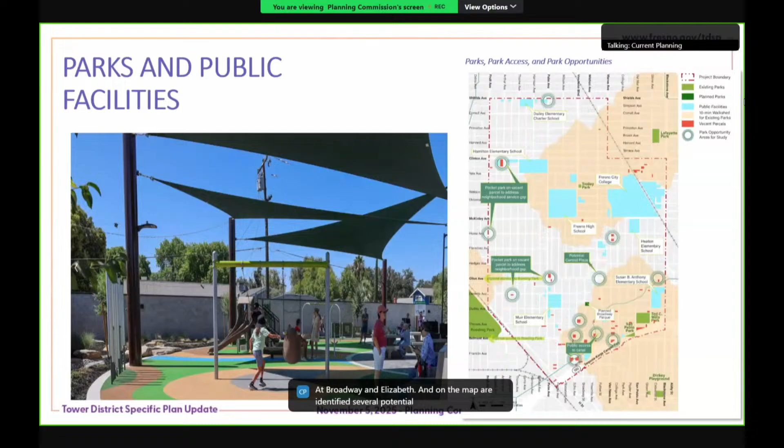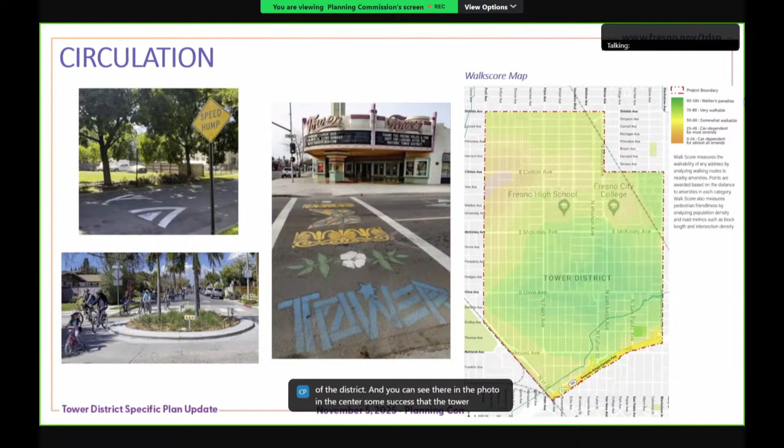The circulation chapter includes policies to improve the multimodal functions of key corridors, to enhance main streets, encourage active transportation, improve transit and pedestrian safety, and calm vehicular traffic. Placemaking and public realm improvement policies are also included to enhance the identity of the district. You can see in the photo in the center some success that the Tower District has already had with doing creative placemaking in the district.

Essentially, what the land use changes seek to do are one of about 3 things. One, align the proposed land use with the existing uses that are on the ground right now. Two, redesignate areas that are underutilized for neighborhood mixed use. Three, increase housing opportunities along the major corridors by designating those corridors for mixed use.

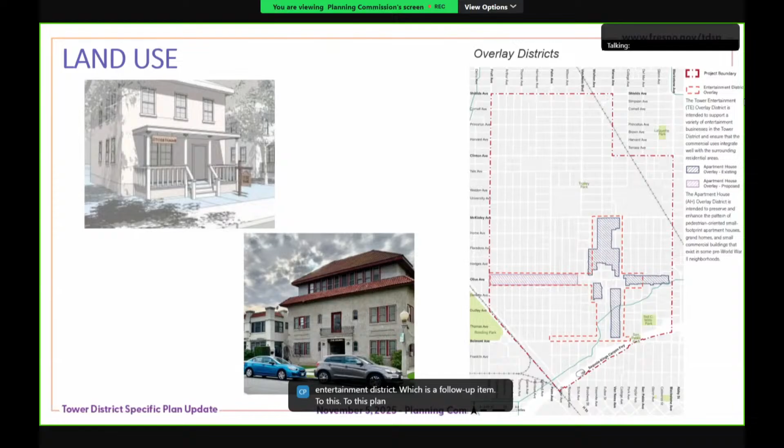So now we will take a minute to describe the new tower design guidelines, which are called the Design Standards and Guidelines. I do want to point out that the Tower District is the only neighborhood in Fresno that has adopted design guidelines, so these are pretty special. They were originally called for in the 1991 plan, and it took a while to get those adopted. It was one of the first things I got to do when I came to work for the city of Fresno, was get those 2005 guidelines over the finish line.

Why did we update these? The 2004, adopted in 2005, guidelines are over 20 years old, and conditions change, construction practices and materials change. Many of the guidelines were incorporated into the new development code that was adopted in 2016. Specific plan policies need to be integrated into these design guidelines. Development feasibility needs to be addressed to implement Fresno's housing element, and California law requires objective standards to expedite review of qualifying housing projects. So that was one of the main drivers for updating them.

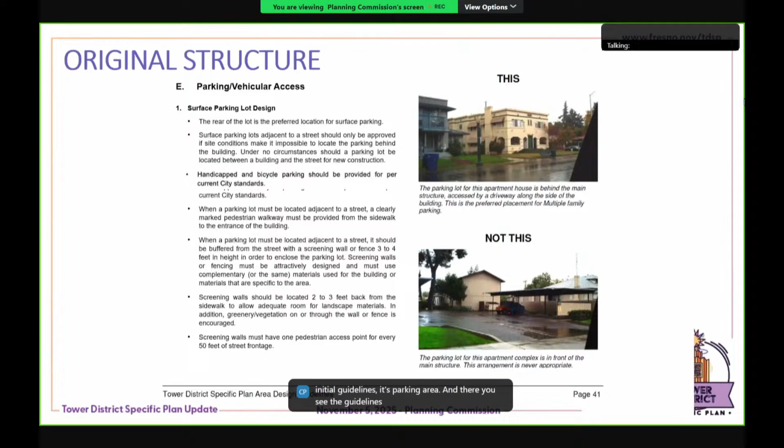They don't look too different from the original guidelines. Here we have just a page from the initial guidelines—it's a parking area—and there you see the guidelines with some photos that we hope are helpful, this and not that. In the new structure, heading names may change to match our development code, and each section is now divided into two sections, standards and guidelines.

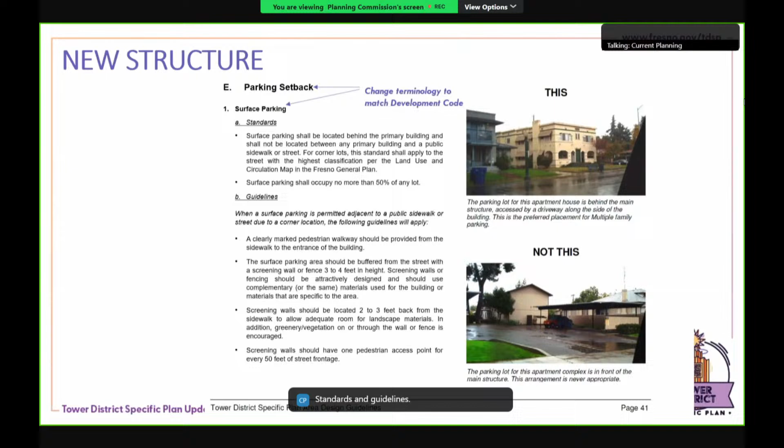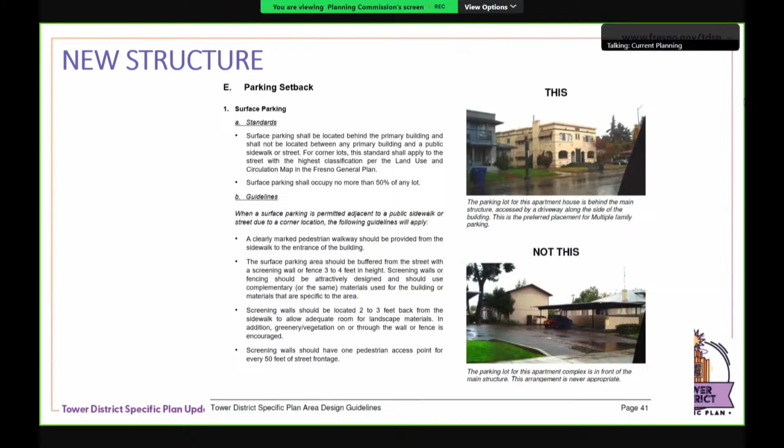I wanted to spend some time talking about the public comment that we received. We're going to talk about not only the public comment we received on the EIR, but also the public comment on the Tower District specific plan and the design guidelines. So we'll start with EIR comments.

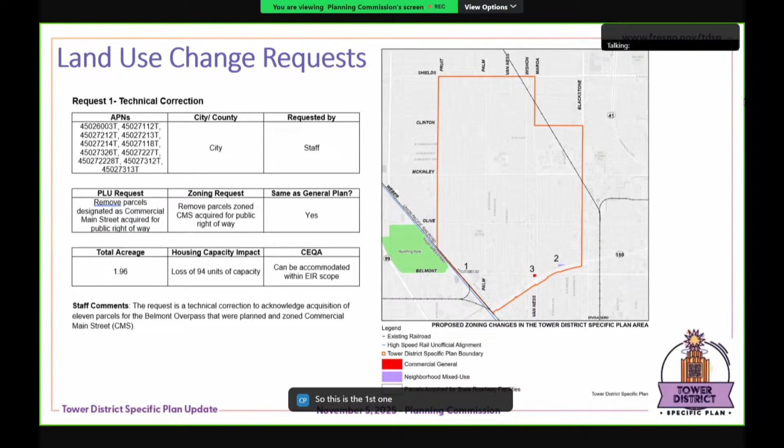We'll go to the second one. This was a council motion at initiation that we did not incorporate correctly on our initial zoning map. It applies to 1 parcel that is 0.58 of an acre, and the request - looking at number 2 - is that it should actually be from medium density residential to neighborhood mixed use. I apologize because that's not what your handout says.

It's medium density residential to neighborhood mixed use. This was initially a request made by the South Tower Community Land Trust at the initiation hearings, and the council did move to include this particular land use on this parcel. Staff actually got it confused with the next one, number 3. To repeat: that parcel, number 2, indicated on the map above, should be going to neighborhood mixed use - it is currently planned medium-density residential. So you could cross out general commercial on your list and put medium-density residential, and I apologize for that.

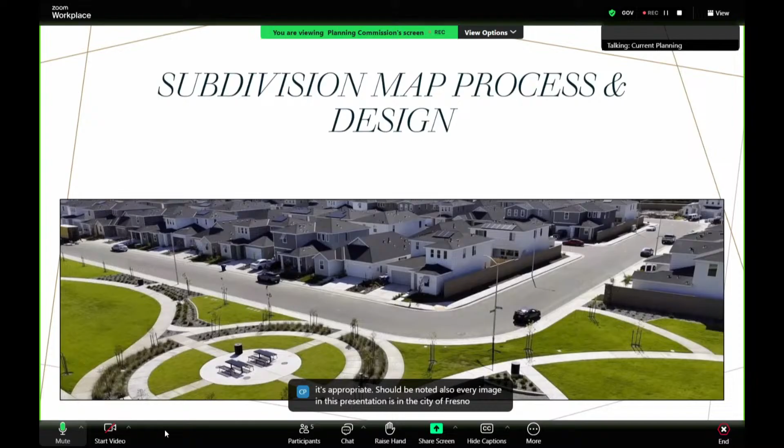We're going to start with the subdivision map process and design. I wanted to show what goes into map design and what's brought to you when it comes to commission is the final product. This is showing everything that goes into that final product to make sure that it does comply with the code, so you understand what we all have to review.

Starting with the basics, there are two different types of maps: parcel maps and tentative maps, or what we call them here, tentative tract maps. Parcel maps are usually 4 or fewer parcels. There are limitations, and that's really just for residential—you can have more with non-residential zones, but that's the standard. With tentative maps, it's 5 or more parcels, and that's generally single unit residential development.

There are vesting maps—you might notice that term a lot—where if it's submitted prior to a code being updated, it still has that vesting right of whatever those code requirements were.

Starting when looking at an application for a tentative subdivision map, we first look at density, which is how dense a project is allowed based on the zone district, calculated using net acreage. There's gross, which is the entire land plus all the major areas, streets, dedications, things like that, but the net removes those dedications. If you have large power line easements, we don't count that towards net acreage because you can't build on those.

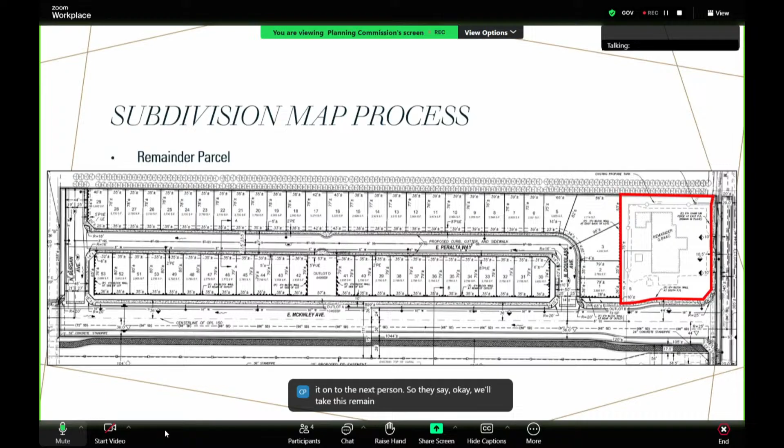So those lots, that remainder was the person that was selling it. They wanted to still live there, but be able to sell off the remainder of their land to the developer, so that they can continue to live there until they pass it on to the next person. So they say, okay, we'll take this remainder, we won't count it towards this subdivision, and we can subdivide everything else. That's the purpose of a remainder lot and how it works.

There are requirements for block lengths. So within a subdivision, the length is generally a minimum of 200, max of 600 feet. When the next intersection comes, then that's the next block, so on and so forth. There could be a deviation if the alignment of existing streets on adjacent properties justifies that, but that's the standard.

And just going quickly through the lots, side lot lines are required at right angles to the street, or radial if curved. What that means is the new properties cannot go straight and then have a jogged line and then go back again. It has to be all straight lines throughout, like normal. It can't be on the side. So that's what that means.

Frontage of lots to public streets is required unless there are private streets proposed or if there's access to a paseo proposed. Double frontage lots are lots where the property has two streets fronting and rearing the property, so there's no property behind you or in front of you. Those are allowed for major streets, where you relinquish the access, meaning you get rid of any kind of pedestrian access from one side, usually along the major street, but you need a 10-foot landscape area as well as a 6-foot wall to allow for that. For local streets, not some of the majors like a Gettysburg or a Shaw, they're only allowed at a depth of less than 200 feet, and they have to relinquish on one of the sides for a local street.

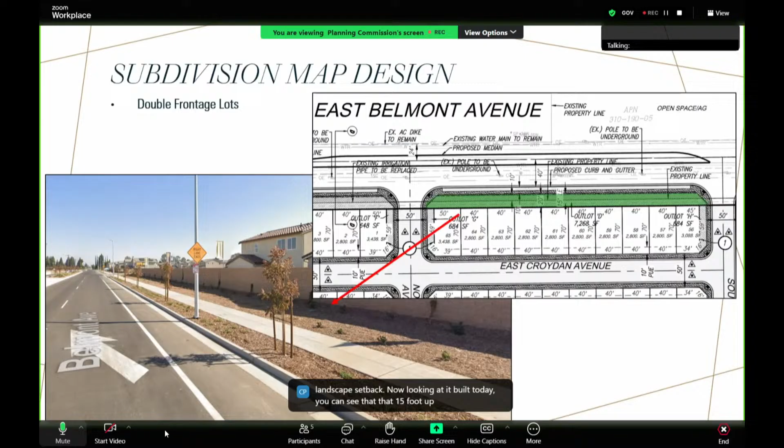For corner lots that have entrances - when a local street, the blue, intersects the major street, the red, which is usually the entrance of a subdivision - those corner lots have side yards onto the local street. The street side yard requires a 10-foot landscape easement along with a wall, and these are usually incorporated as something called outlots.

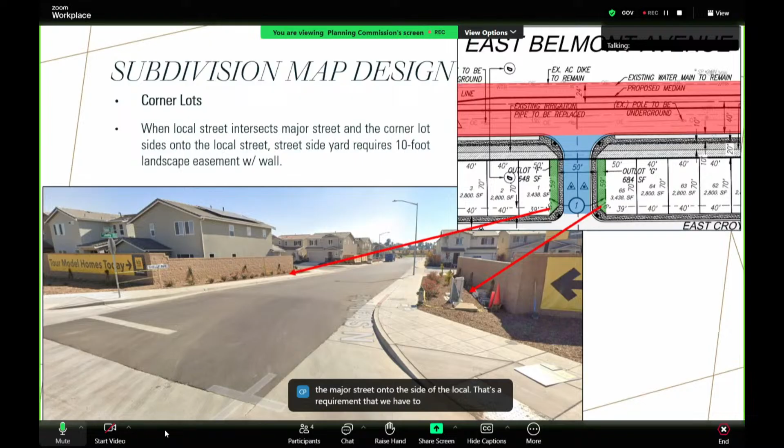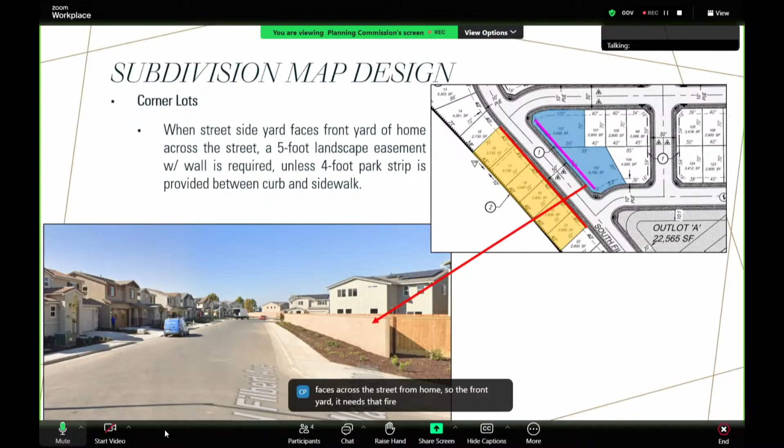The blue is the side on the right with the red arrow. Because that street side faces across the street from homes - the front yard - it needs that 5-foot landscape easement and a wall, which is what they did here. They could have also done a 4-foot park strip, either way. So that's what that means and how that works.

For connectivity and street design, we look into three things: local streets, connectors, and majors. Locals are your standard interior streets within the subdivision, minimum right-of-way, based on public works standards. Connector streets connect major streets through the center of quarter sections, both north-south and east-west, or as close as reasonably possible to the center alignment based on existing features. It sounds confusing, but I'll show some pictures that make it easier. Major streets are your standard collector, arterial, super arterial, and expressway.

Herndon is an expressway, Veterans is a super arterial, and Gettysburg in some places is a collector. So getting to connector streets - some work perfectly, some do not.

So here you can kind of see the 4 corners of the major streets, and the yellow are the connector streets. Connectors, I call them glorified local streets, a little wider than your standard local. The purpose is to get everyone within that major intersection, the 4 bounded streets, to a street that can get you quicker to that major street without having to go to an extended speed. A lot of these streets going east, west, north, south have a stopping point before reaching the major street. They never connect directly. That's the purpose of those connector streets. But sometimes we don't get that.

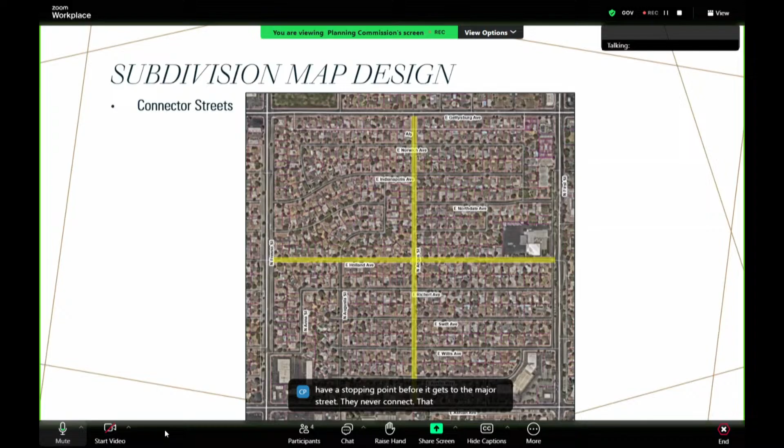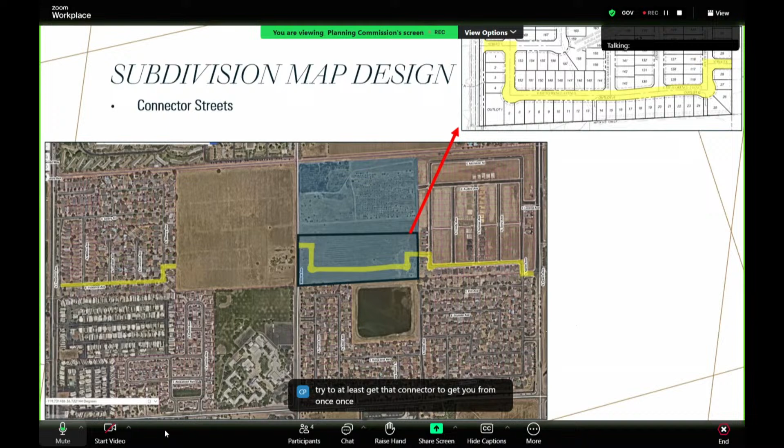Now, connections to adjacent areas. Where the subdivision adjoins unsubdivided land, stub end streets shall be extended to the adjacent unsubdivided land to provide access to the unsubdivided land in the event of its future subdivision. There's one connection required for every 600 feet of adjacency. That stub street is to be designed as a temporary turnaround, which might look like a cul-de-sac to you. I'll give you an example.

This is not applicable to planned developments or gated subdivisions. So what that means is on the right pane here, you'll see a subdivision that was approved earlier this year in Cornelia near McKinley. There are both examples here: there's an existing connection to the eastern subdivision that's already built out, and then all of this is what I call similar zoning - it's all residential single unit, all RS something.

So when there's availability, large areas that aren't developed on adjacent properties, you want to connect to that for future subdivision in case the next person 10 years down the road wants to develop this and can connect to that. Now, if this was a gated community, we wouldn't consider it because it's going to be walled and it is what it is.

But how that is done, you can see going to the north, there's kind of a circle there. That's a temporary turnaround. The applicant has an opportunity to contact the adjacent owner to see if they can build it on their property so that in the future we won't have this turnaround to deal with that just looks weird - that way it's just a straight road, and the person can demolish the turnaround and keep building.

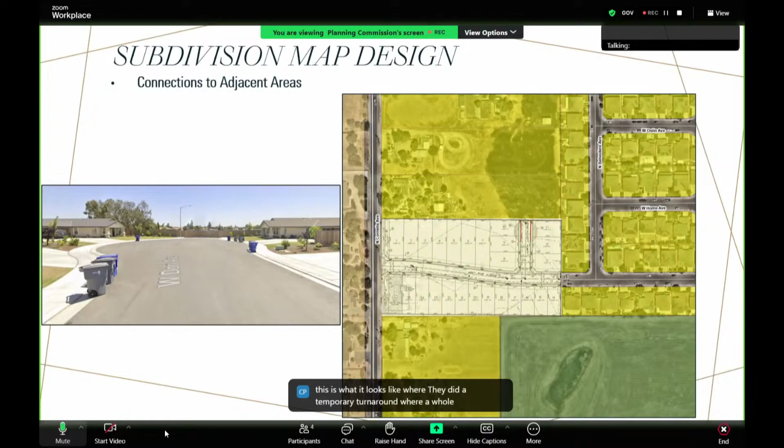So quickly here, emergency vehicle access, known as EVAs, are points or areas in subdivisions that are gated and usually only accessed by fire or some emergency vehicle. And then pedestrian access to major streets - for subdivisions adjacent to a major street, you need a pedestrian path spaced no more than 600 feet apart, usually a paseo. I can show an example.

So starting with EVAs, we have this map in Copper River where on the map, the blue area is the private gated pedestrian access point.

And that's the only one. Usually you need 2 points of access for fire. So on that map, I have a couple of red squares - that's where the EVA gates are. You might see them all around Fresno. That's what it looks like to the left, where usually the public can't use that, but fire can access it if they need to get in and out, in case they can't make a specific turnaround or something like that.

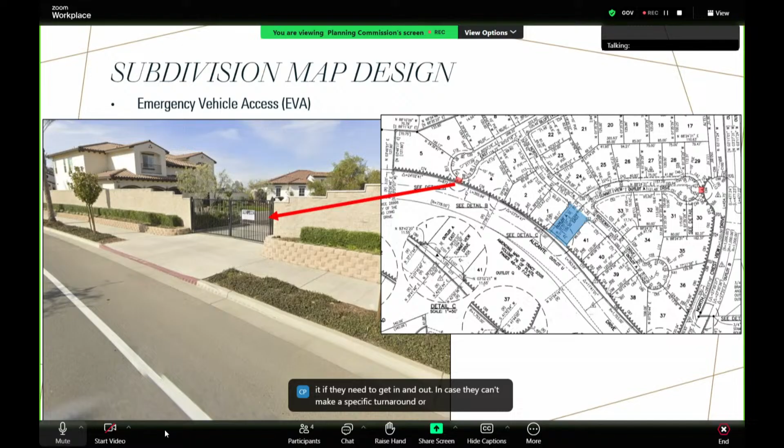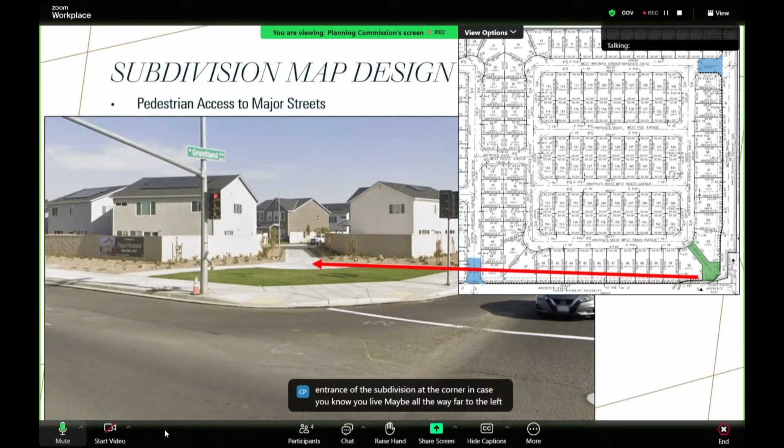For pedestrian access to major streets, if you have larger subdivisions with wider or longer depth, it may be longer than 600 feet - maybe 1,300 feet long property, all along a major street. You'll need some kind of paseo so that when someone lives deep in the subdivision, they don't have to walk an enormous amount just to get out. Paseos let you access schools, transportation, whatever you need. Here's an example of a great feature for the entrance of the subdivision at the corner, in case you live far to the left and would otherwise have to walk all the way around. You can just hit that corner and you're good.

Trails - incorporation of site constraints. We have planned trails all throughout the city, and when we do have planned trails, we have to incorporate them in our subdivision design. What it states is homes should front onto a trail or other communal area unless topographic conditions justify a variation, the proposed homes would face a major street, or the Planning Commission determines there are no feasible alternatives. So I'm going to show you an example of what happened prior to this code and why this code exists today.

Here you can see a trail that has homes siding and backing onto it all the way down the corridor. The homes are not facing the trail, they're not fronting it. Usually when you front a trail, the intent is you have eyes on the trail - the front of the home can see it. Here, if someone were to bike or walk at night down this trail and there's issues with crime or something going on, there's really no preventive measure for someone to get help. Nobody can see you. It's just a dead-end area, so it's probably not going to be utilized as much.

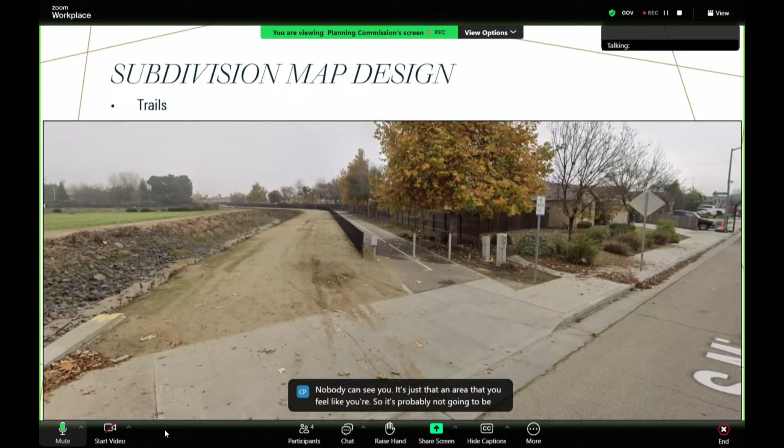That's when that code came into play, and this was a subdivision approved a couple of years ago. Originally, when it was first approved, it didn't have that requirement. Now they came back because it expired, and that requirement was now in place, and it's being constructed today. Here you can see the red line is the front of all these homes with a street looking at the trail. It also allows for siding - if you see the home on the top right, that pink line, it's siding onto the trail, but not backing onto it. That's also allowed because usually the side would lead to a street.

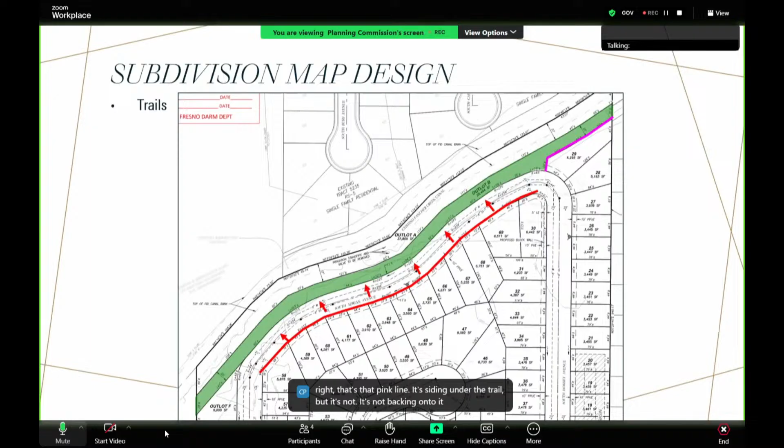When you do that, you start getting homes that front onto the trail. They're looking across. You would feel much more safe going down this trail because you know there are eyes on it - someone can see you if something happens.

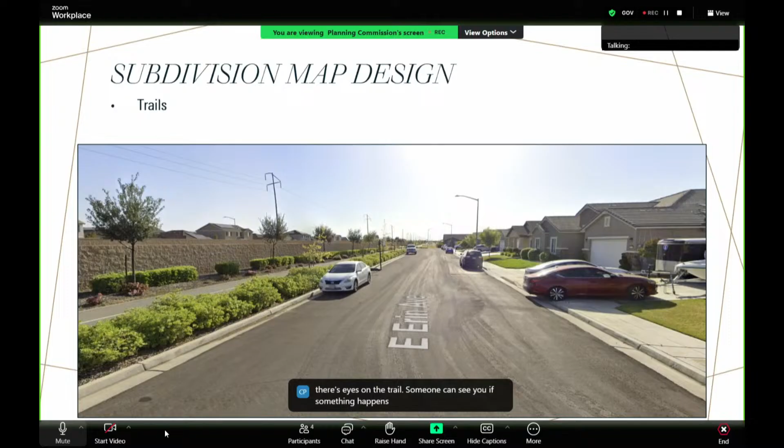Now, getting into open space, I want to make sure you understand planned trails do not count towards open space calculations, so keep that in mind for the future. Open space for single unit development applies when you have more than 50 parcels. If you have 50 parcels or less on a map, you're not required to have open space - you just pay in-lieu fees, although you can provide it if you want to. It's just not a requirement.

When you have more than 50, there's this number I have ingrained in my head: 0.001884 acres per dwelling unit. That stems from our general plan, which says we need to dedicate 0.6 acres per 1,000 residents - that's where that number comes from. So when you have a subdivision that requires open space, as an example: if you have 51 lots, that results in about 4,100 square feet of open space. If you have 150, you're looking at about 12,000. At 300 lots, you're looking at a little over half an acre.

So just to get a sense of when you see that open space, if you feel like it's not enough, it's a requirement for code to make sure it's enough. And the location should require that 50% of that park should be abutting a street, a trail, a sidewalk, something accessible and visible to people.

And then homes should generally face or side the park, not be in the rear. And they should be centrally located. There are some times where that doesn't happen, they could be split up, but they generally should be centrally located.

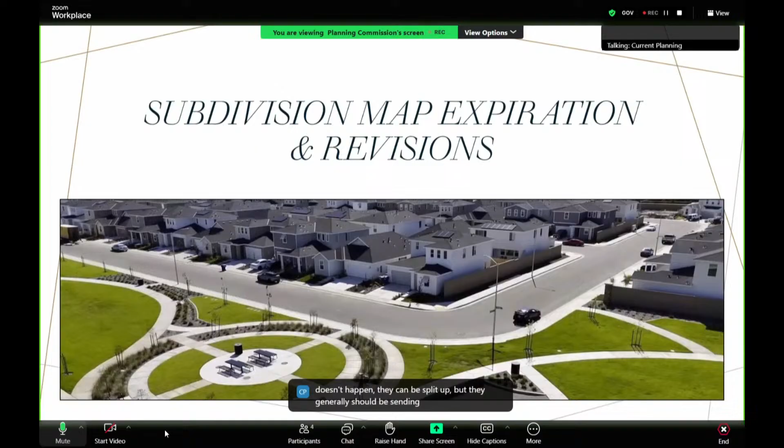And then getting into the expiration and revisions. Expirations of maps, the standard for all maps is 2 years. There are discretionary extensions that an applicant or developer can propose or request to us. That does have to get approved by the Planning Commission.

And usually that comes in 1 or 2 year increments and up to 6 years. Sometimes it's just the market conditions, sometimes it's, at a time it was COVID, so it just depends what it is. And there have been legislative extensions in the past, upcoming, and current that allow for automatic extensions.

So then there's something called phased maps. So when a tentative map, which is what you review, gets approved, it then has to go to final map, is what it's called, and get recorded. That's where the actual lots become legal, and that goes through our Public Works Department.

As part of that, they can do a phased map where, let's say you have a 500 or 1,000 lot subdivision, a very large one. Usually there are requirements from Public Works and other departments that are pretty significant on cost and everything, and so they want to do it in phases. I want to do 100 lots first, then the next 100, maybe another developer wants to buy this portion and do that, and so we phase it out.

Now, it should be noted that the word phased map is all that is needed on tentative maps. It is actually under the Map Act that they don't have to draw out the phase lines if they don't want to. That comes at final. So at final, we make sure that whatever was conditioned at tentative gets built, just in a logical manner.

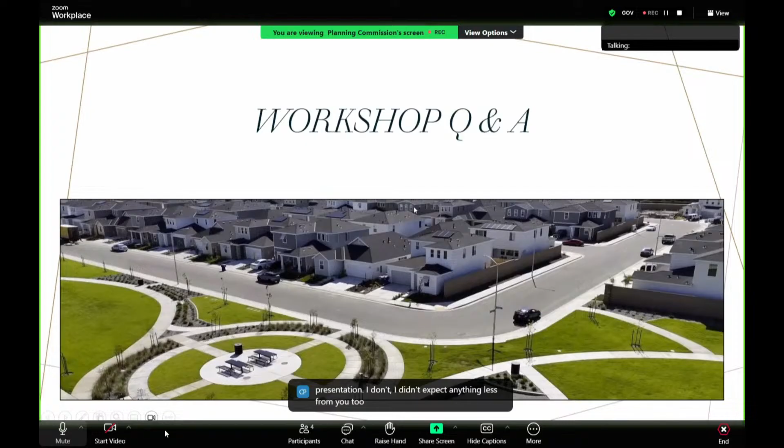Hey Rob, well first off, great presentation. I didn't expect anything less from you too. Okay, all right. But I think this kind of goes to show, I know sometimes we come up with a lot of questions and we ask you to make a lot of these revisions, but I think this is very applicable to what we do all the time, because this allows us to see the insight and the amount of due diligence that you and the team actually do too.